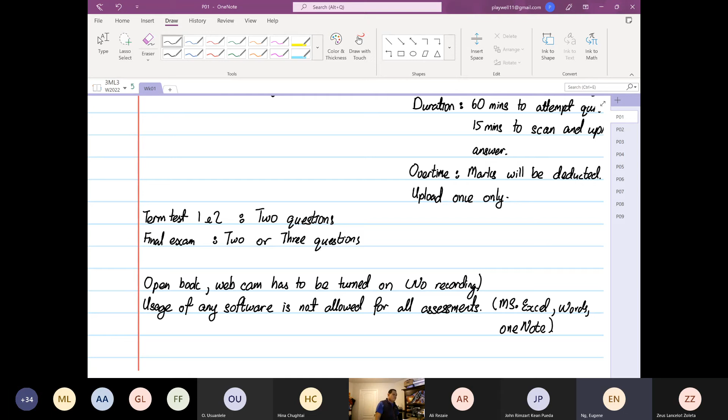Sir, the textbook, you had mentioned it's open book. Are we allowed to use the PDF version of the textbook? Yeah, you're allowed to use the PDF version, I'm fine with it.

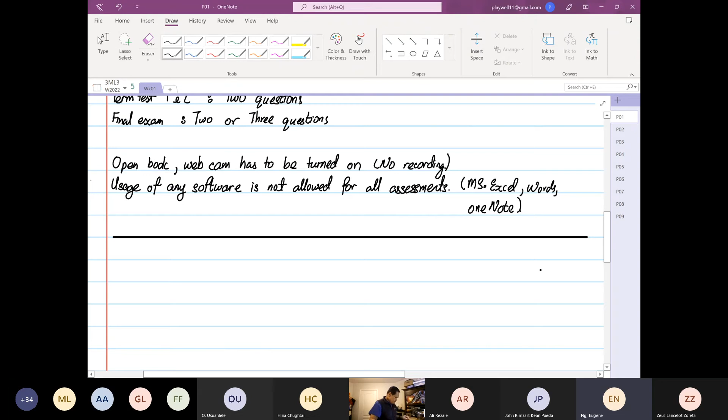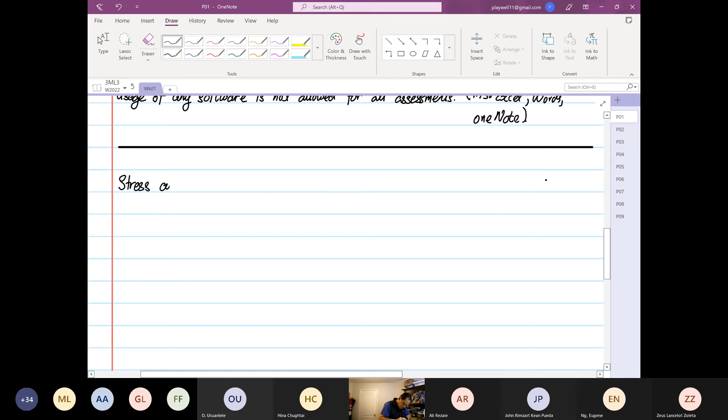Stress and strain, under Axial loading. Yeah, under Axial loading. So on the textbook, if you have to find it, it will be on chapter 2 of your textbook.

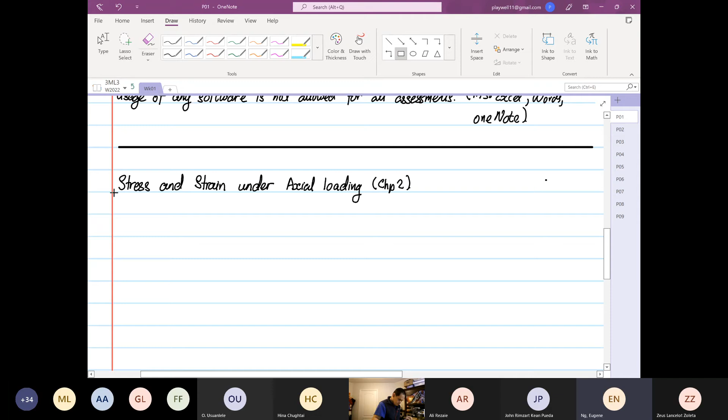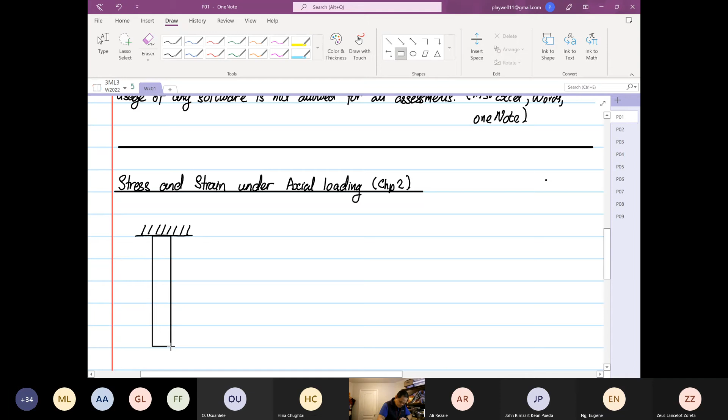So what do we mean by Axial loading? If we have a beam that is fixed to the wall or to the ceiling, and then this is our beam, and the beam has a specific A, which is our cross-sectional area.

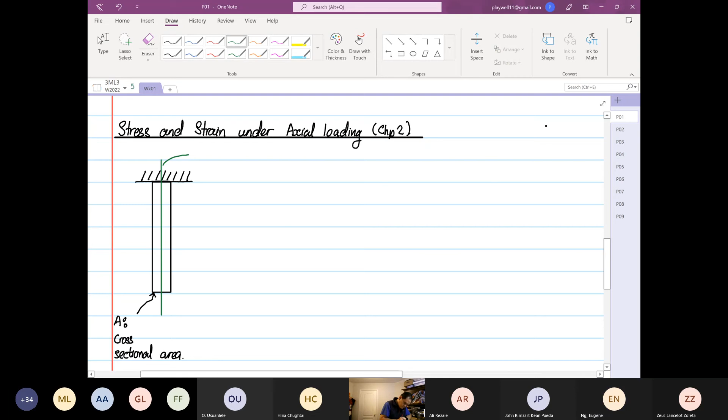And then on the beam, I'm going to draw the axis. I'm going to draw the neutral axis. Sorry, I won't call this the neutral axis, I'll call this the centroid. And then I'm going to draw my transformation. So this is X, this is Y, and using right hand rule, this is rotation about Z.

Right hand rule means you use your right hand and you see how your hand is rotating, and if your thumb is pointing towards you, for this case the thumb is pointing towards you, you can see how your hand is closing. So X, how your hand closes, X touches Y.

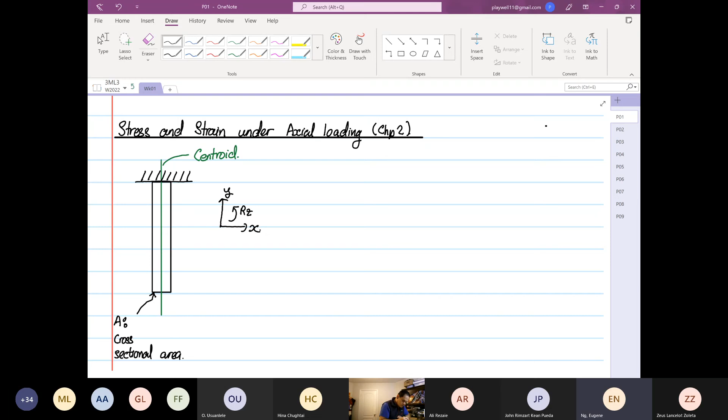So from here we have a load, coming down this way. So this load will be known as Py because it's acting in the Y direction. So the load, as you can see, is applied parallel or along the centroid, is applied along the centroid.

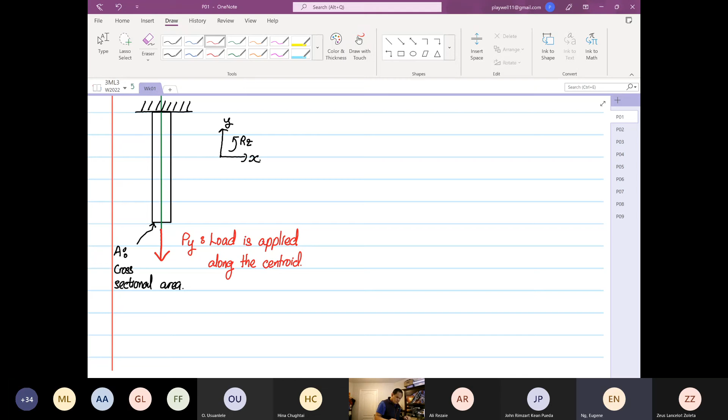Right, so I'll help you recall in case some of you can't remember. So during truss analysis, during truss analysis, all members are under axial loading only.

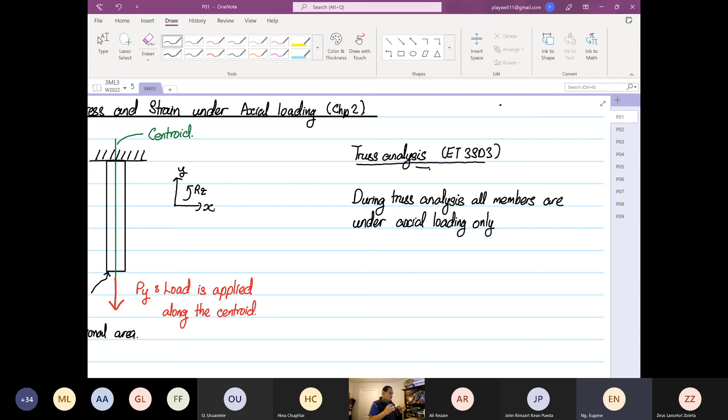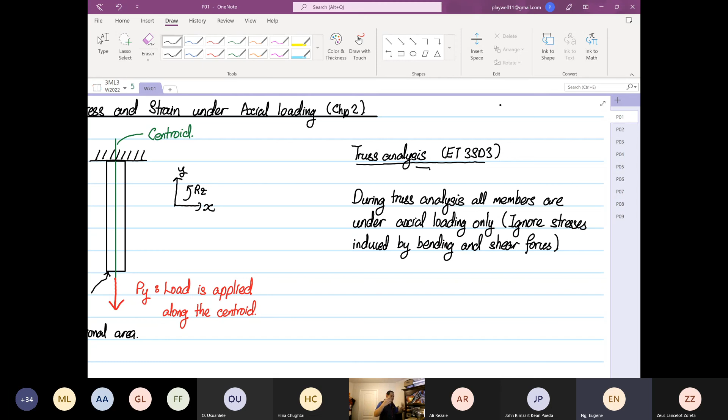Okay, you only assume that the structure can take axial loading only. So i.e. we ignore stresses induced by bending and shear forces. We ignore them. There's nothing wrong with it, it's just a way of simplifying the analysis. Nothing wrong with it, it's been used commonly.

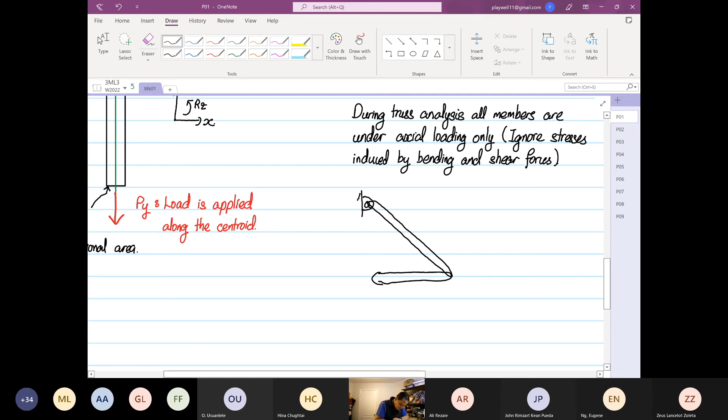So what do I mean by members? Let's look at a simple beam. We have a beam in this direction, and then another beam in the other direction at a certain angle. The beam is held by two pins, and another here is also pinned. This is point A, over here it's pinned also, point B, and then point C.

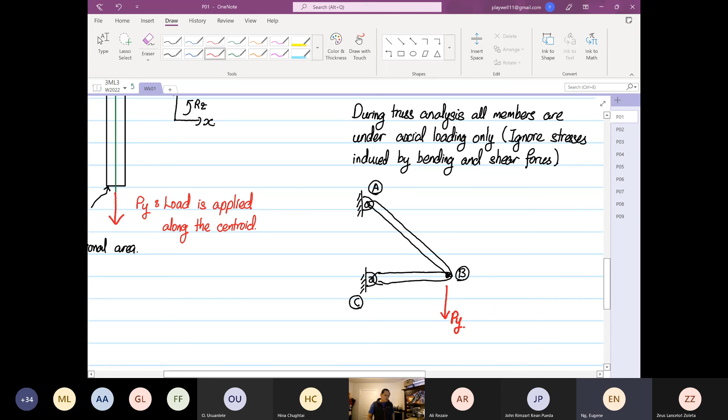So for this case, a very quick example, we have a load applied in this direction, and this load is coming down as Py. We want to find, for this very short example to make you recall what truss analysis is, the stresses in members AB and BC. Okay, you could recall this, right? I know probably most of you have done this like 3 months ago and written everything for your prof. That's why I'm doing a short revision on this.

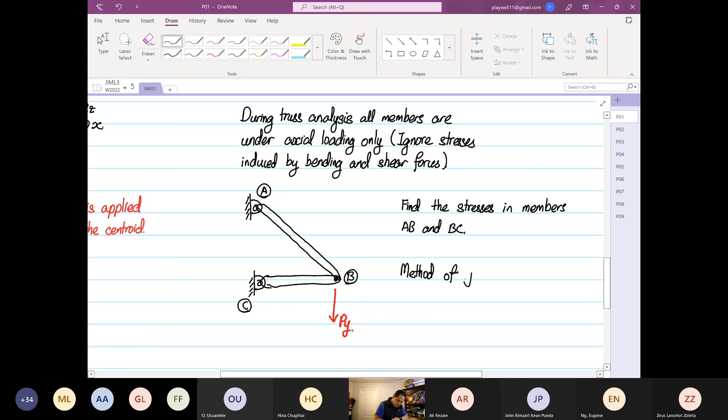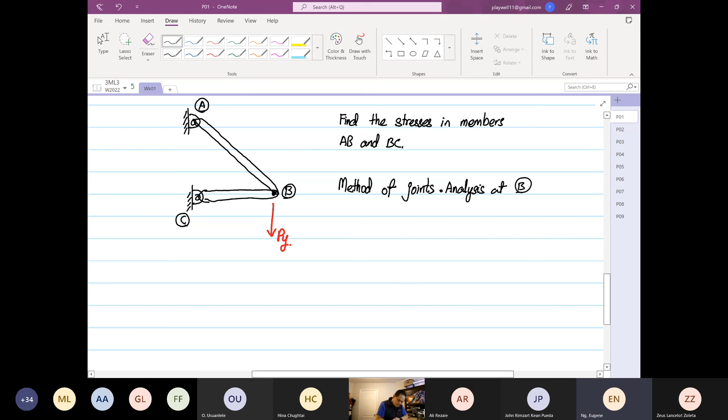So when you write this out, we can apply two methods. The most common method is methods of joints. You apply the methods of joint, so you're going to focus analysis at point B. You're going to do analysis at point B, so we're going to draw the point. This is our point B.

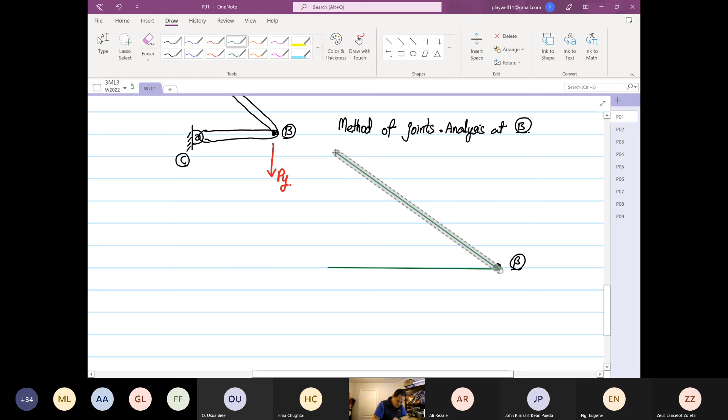Point B has two members attaching it. One member is in this direction, and the other member is in the other direction. The first line I've drawn is for member BC, and the other one is for member AB. Based on axial loading condition, the structure can only take forces acting along the green line, it cannot do any otherwise. So for BC, it can only take horizontal forces. On AB, it can only take forces based on that orientation that you've seen.

So now when we have a load Py over here, if there is no member AB, right? Py, the point B will go down, yes or no? BC cannot take any vertical load. I'll write down here: BC cannot carry any vertical load.

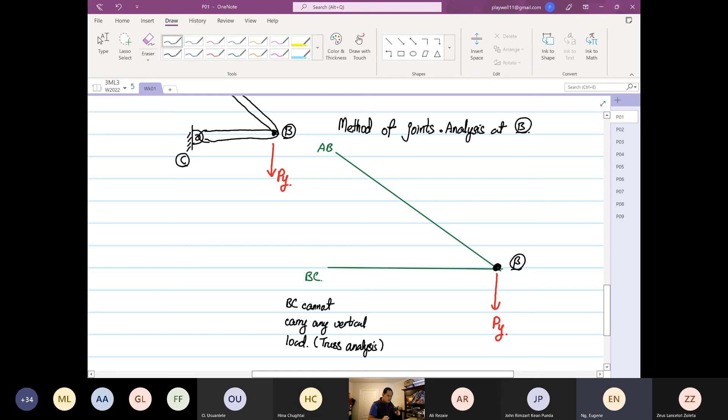And why is that? This is because we are doing what - truss analysis. So the only member that can take Py load is ABY. I'm going to draw ABY. Why do I call it Y? Because I'm following the transformation - this is X and this is Y, and this will be rotation in our Z direction. So when that's the case, force AB will be going in this direction. I'm going to sketch out force AB. So this is our force AB.

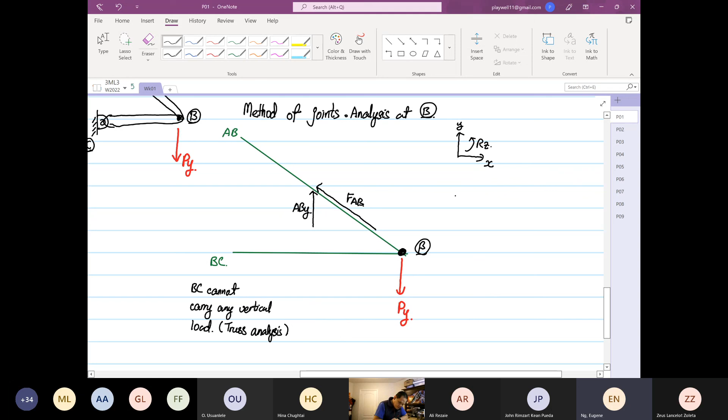Unfortunately for the force AB, right? So let's do some very simple calculation first. We do positive that is going up, so we carry out static analysis. Okay, static analysis.